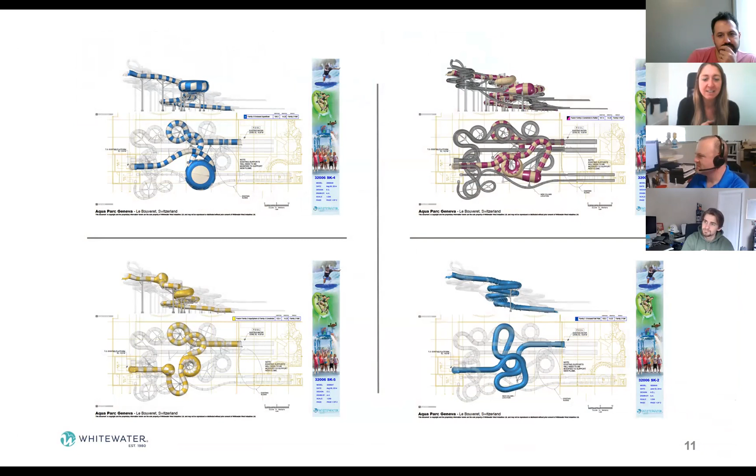And this is their marketing of it. And this is the slide actually built.

The closest clearance from the new slide to one of the existing slides is like 3 inches. They were basically pushing fiberglass out of the way to get it to fit in there. We're glad they had a good site surveyor to ensure it was actually correct when we got on site.

The next one I feel like I must show you is Rokko Island. Rokko Island is a project in Japan, and Whitewater has a long history of doing projects there. It was our first international foray into the Asian market. We met a Japanese man and started building water slides with him.

They wanted 100 slides off of one tower, and we said that's way too many, not possible. So we ended up doing 50 of them. The entire thing was designed on onion paper - we didn't have any computers at the time. It was all just a big stack of onion paper slide path designs.

Then this entire island, Rokko Island in Japan, had an earthquake that broke all the foundations. All the mechanical systems were ruined, everything around it was ruined, but the water slides were still standing tall. An agent in Japan started taking these apart and trying to sell them to parks as secondhand slides. We had to call him and kindly ask him to stop doing that, because he was eating our lunch - we couldn't sell anything because he had all these used slides on the market.

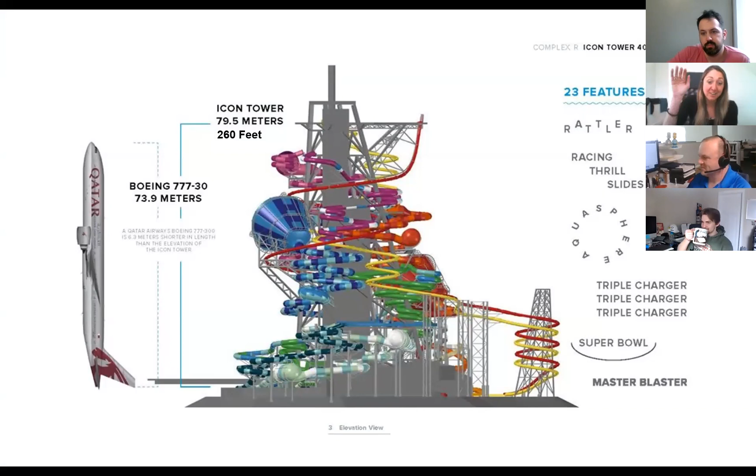And then there's a ride that goes from the very top all the way to the bottom, which is like the longest slide of all time, by far.

This project has been conceptualized for the last maybe 7 years, and we saw renderings of it, and we had no idea if it was ever going to get built. And they are well on their way to constructing this.

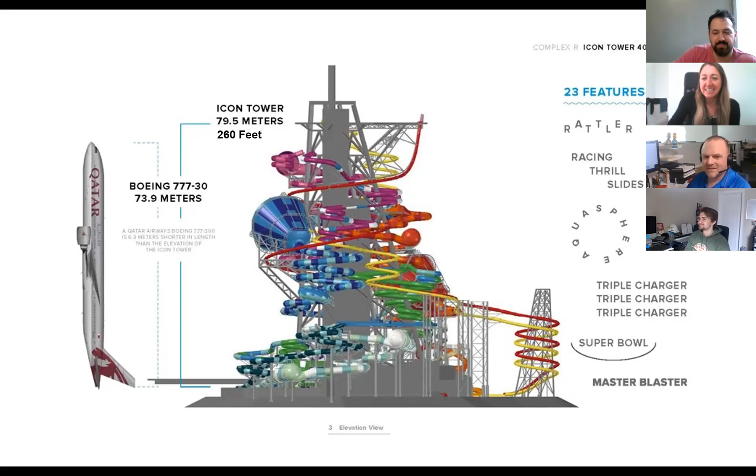We've got fiberglass on site, and we've got steel on site, and they're opening for, is it the World Cup? Maybe this. I might be wrong there. But if you want to go to the next one, Kelly.

So it's on a man-made island, and there's a train that you line up in the rest of the park, and then take a train over to the island, and it takes you to the central core where there's food and washrooms and everything within the central vertical water park.

We had a lot of questions when we were starting to work with the client on this. How are we going to ventilate the slides? It's in Qatar, it's 100 degrees, and these slides are long, and they're going to be sun beaten all day, and they're going to be hot.

It's a big one. How are we going to get water to the top? How are we going to support the slides? This blue slide here is 55 feet across, and that's just hanging off the top of a tower.

And how are we going to build them? There's been a lot of questions, but we're getting through those, and the project will probably be open within the next 8 months or so. I think November is when they're looking to do that.

Alongside this massive vertical water park, there's also an entire other water park that is just kind of flying under the radar because everybody's looking at this. If you want to pop to the next one, Kelly, you can see that.

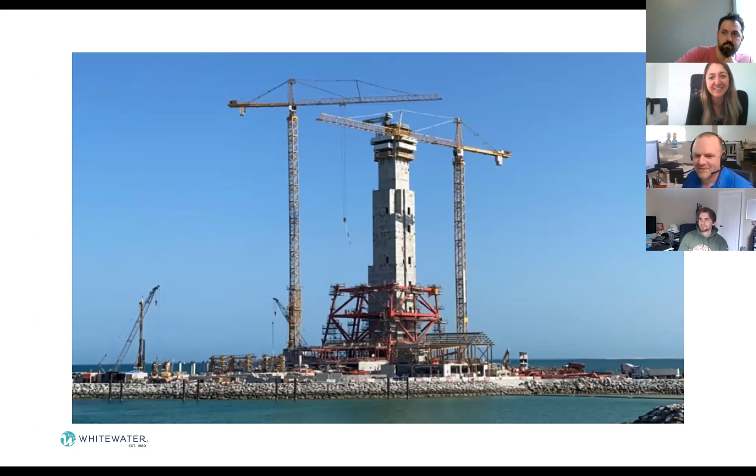So I like to call this the geek stuff. I was saying to Nathan before, I'm an engineer, you guys are physicists. This is like orangutans and gorillas, choose which one you are. We're very, very similar, we used a lot of the same theory.

So I'm going to go through how it is our team goes about making the slides safe. I tell people all the time that just because water slides are fun, it does not mean they're easy to make. Very simple. So when we get students coming in, I'm going to start from square one.

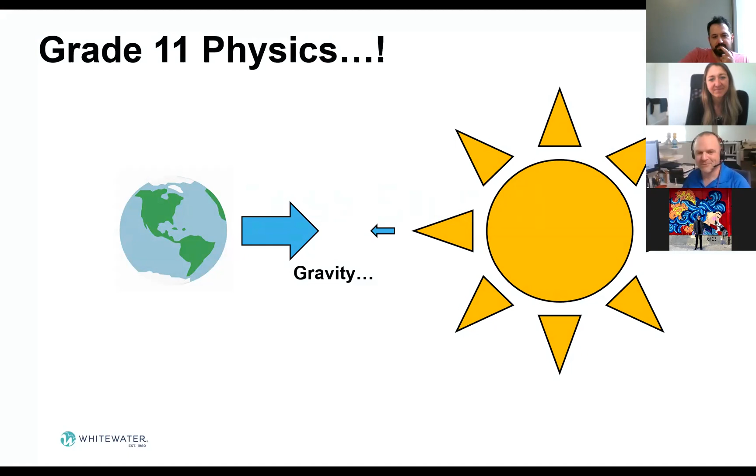Grade 11 physics. Gravity. It's the most reliable force in nature. The sun pulls really, really hard on the earth. The earth kind of pulls on the sun. Same thing on a smaller scale, it pulls on people. F equals MA, or mg.

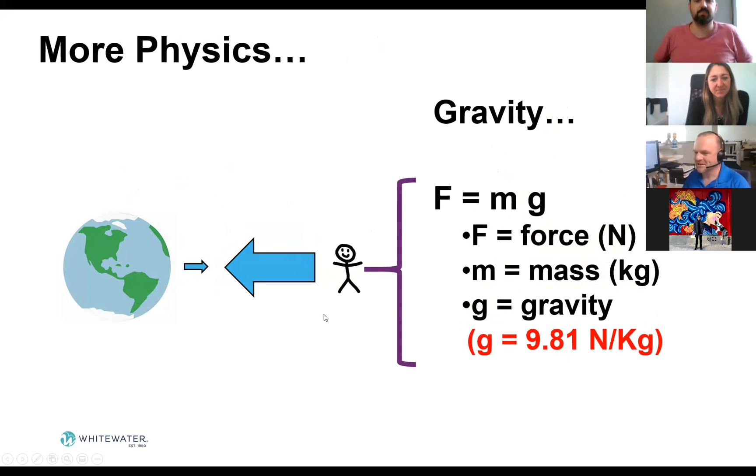But this is how, in basic principles, we work with the body flying down the slide. The force of gravity is split up into two vectors. Pretty simple stuff, but it's actually more than that. You're dealing with something you would call a cylindrical coordinate system, where you've got the basics of a body going down the slide, but you also have to consider the rotational component.

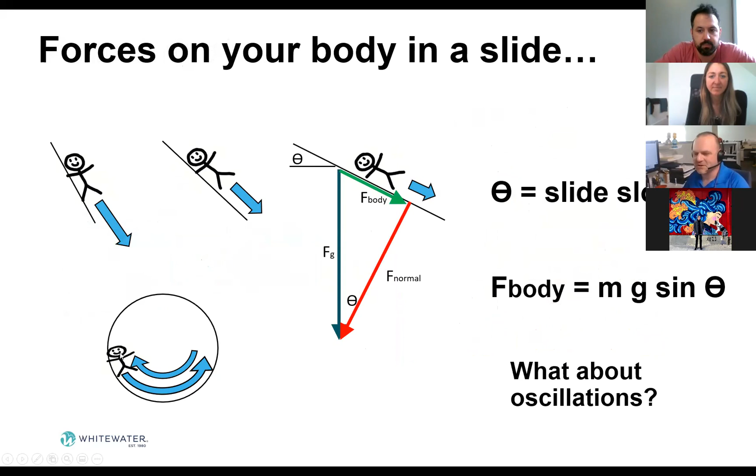So what about oscillations? Oscillations can be very dangerous if you sweep one way on a slide and then suddenly sweep the other way just as they're oscillating to the top, and suddenly the slide sweeps away, then you can send someone airborne into the far wall. And that is one of the design features or design criteria that we follow.

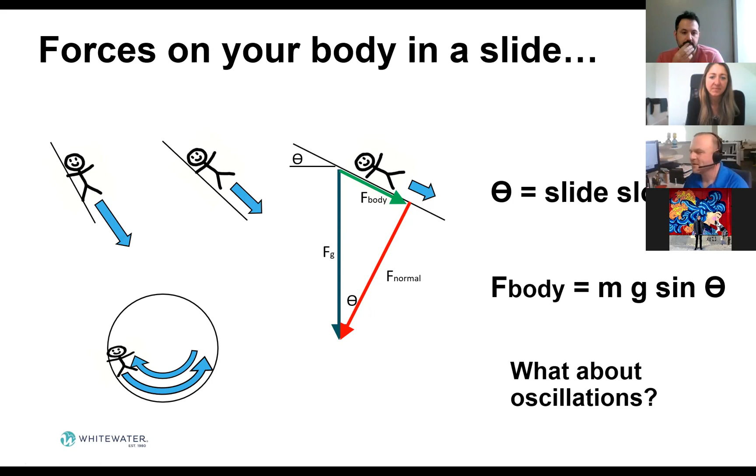It's called switchback analysis, or oscillations. So let's see, next slide is how do we actually do it?

We have two proprietary in-house pieces of analysis software. One is a very detailed simulation system where we have a liquid-cooled supercomputer not far from me that runs simulations all day. It can take half an hour or more to run a simulation on a single slide. So this is an enormous amount of data being run through and analyzed.

And what it's really doing is breaking up this slide component. This one on the left is simplistic—you could solve that with a single calculation. On the right, it's a very complex, sweepy, curvy shape. So what it'll do is break that up into, I don't know, 10 million parts. A lot of parts, and for each one it considers what the energy state is coming in, what the energy conversion is across that element, so you know roughly what the energy state is at the exit. And the 'roughly' part is where the challenge comes.

We have studied and studied and studied this for, well, over a decade. Five years before I started working here, we started working on simulation analysis, and it allows us to have a fairly high degree of precision in predicting how a slide will work with a body, a tube, or a raft. I'll show you some examples later.

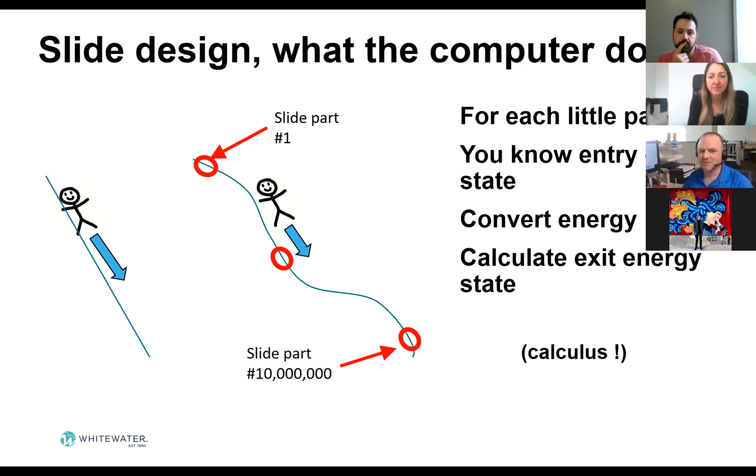But the common assumption, as I said, is that water slides are fun, therefore they must be easy to make. What we're really looking to eliminate are three conditions.

There's catching air—you want to give the illusion of someone catching air, but that doesn't mean they're actually losing contact with the slide. You want to make them feel light, and that's a foreign feeling for them. You also want to avoid giving excessive G-forces. Various regulatory bodies around the world have different levels of G-forces they allow you to work to.

But that's one thing. The reality is that, generally speaking, no matter how much water you put in a slide, if you exert more than 3 Gs on a body going down it, you will give them skin burns, no matter how much water is in the slide. So that's kind of a pretty hard limit to work to.

And then, as I said earlier, there's poorly timed oscillations. If you do it just wrong, you can give someone a very bad day. And we pride ourselves in the depth of analysis and utilizing the work we've put in over the last 10 years of fine-tuning these tools.

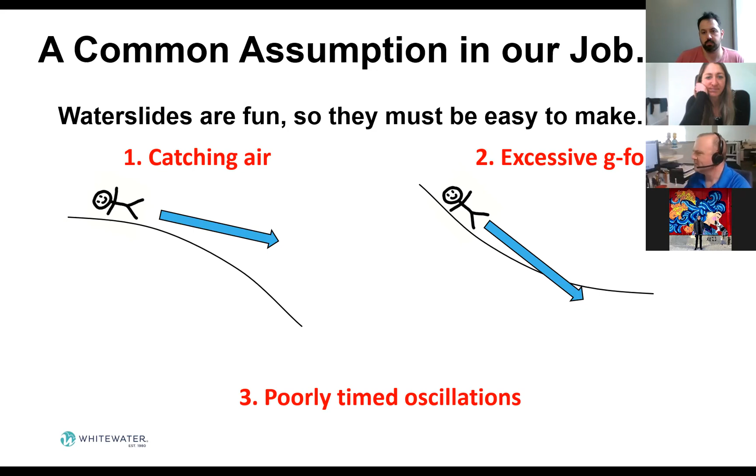So how do we go about designing the ride experience? I like to say we design the experience, and that results in the water slide design. So what we'll do is Emily will be dealing with an end user or client, and they'll say, I want a slide that's steep and fast, or one that oscillates and lets you feel light, or one that really whips you around a corner. So we can design—okay, this is almost the story of the ride.

And then throughout, as you're designing it in our design software—just SolidWorks—we will look at it and identify, at any given point, the velocity at that point. I'm hoping you can see my arrow. Our simulation package can predict that velocity to a fairly high degree, and from that we know the grade they're operating at.

And from that, we have curves generated for all of our slide parts that show what you see here. The green area is 0.4 Gs or more. I've left the velocity off just because I don't want to get too deep into the hard numbers—I just want to show the theory here.

The higher the velocity, the less steep you can tolerate before it winds up getting lighter and lighter. So the green area is a relatively benign but fun slide experience. The yellow area is what I call the sweet spot. If we map the velocity from our model to the grade at that particular spot, that's where the bang icon is, and if that exists in the yellow band, it tells me the rider is going to experience between 0.2 to 0.4 Gs.

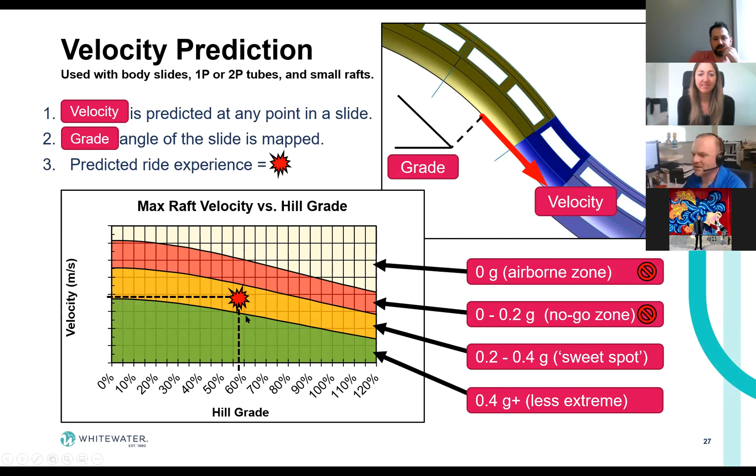So, predicted velocity versus grade - this is how we design and tune the experience. Every one of these sections has slightly different curves. These are the convex parts, mainly for water coasters - one section of our product matrix. But the concave parts at the bottom of a drop, where it comes down and goes up a hill on the other side, we can also look at the G loadings you meet - the top line is 3 Gs and the bottom line is 2.6 Gs.

CSEI is the Chinese regulatory group, and ASTM is generally everywhere else. So we can predict based on that. One thing to note is if anybody ever applies to Whitewater, we will ask you about the G-forces allowed on a person in an interview. That's a question that comes up all the time, and it's always at the end.

I got asked that, and I think I guessed 8 when I first started. So I gave away the answer. Yeah, you gave away the answer. I mean, you can also Google it, but it's something we ask kind of tongue in cheek.

Okay, so these charts are showing what the body will feel like as it's feeling light, and this chart here for multiple flumes shows what the body feels like when experiencing excessive Gs, like being pushed around a corner or through a drop.

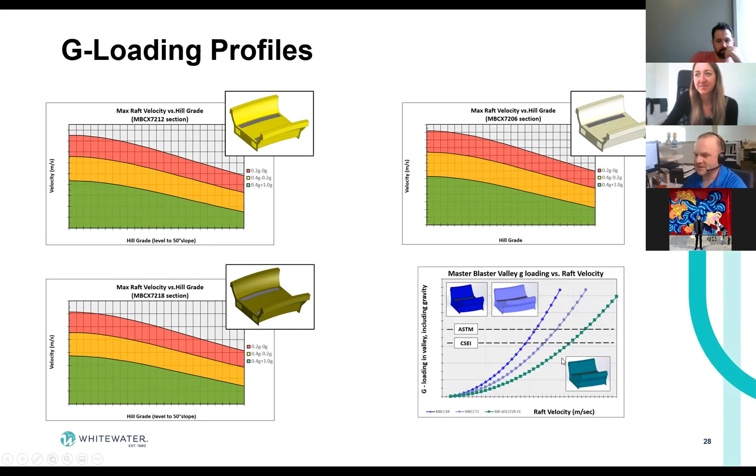This was the first project I went to when I joined Whitewater. I was the first Whitewater employee to ride this thing, and my heart was in my throat - I didn't know what I was getting into. It's an exhilarating ride. The initial drop is on the order of 10 meters or so, about 30 feet. At the bottom, you're doing between 13 to 15 meters per second, so it's fast. You feel around 3 Gs at the bottom.

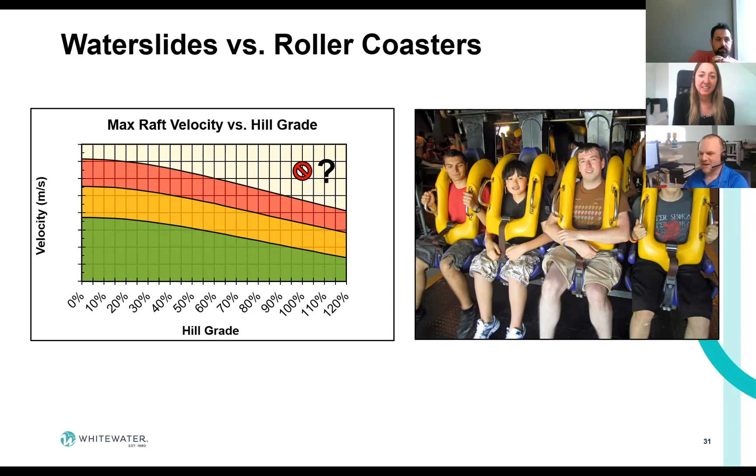However, in a roller coaster, it's different because, as you can see, these people are strapped in. There's very little that can happen to them. So I'll get to the other physics and analysis that affects them here. It's not all just about g-forces—there's, of course, position, velocity, acceleration, and jerk.

So these are all derivatives of one another, and jerk is the one that many people don't know about. I tell my kids all the time, do you know where the name Rice Krispies came from? Position, velocity, acceleration, jerk, snap, crackle, and pop. In my past experience with industrial automation, we went as far as snap, crackle, and pop to get sub-micron tolerance positioning of servo systems and so on.

But in water slide design, we handle position—that determines the launch frequency, how many rafts you can put into a slide design and guarantee that they will never collide with each other. We call that zoning a ride. Then velocity applies in safety codes and slide design—do you want to make it fast, do you want to make it slow, do you want to make it exciting, yada yada yada. And then acceleration, preventing airborne conditions or excessive g-forces.

But that's not everything—jerk is important in terms of avoiding whiplash. And every time I talk to an engineer or a physicist, I always throw in this gratuitous geek joke. I've got this written on my wall right beside me, and it says, "Don't be a jerk."

So what's really going on in the background is we all love calculus, right? I hope there's some heads nodding. We all do calculus—I hated it when I was in university, but you have to do it.

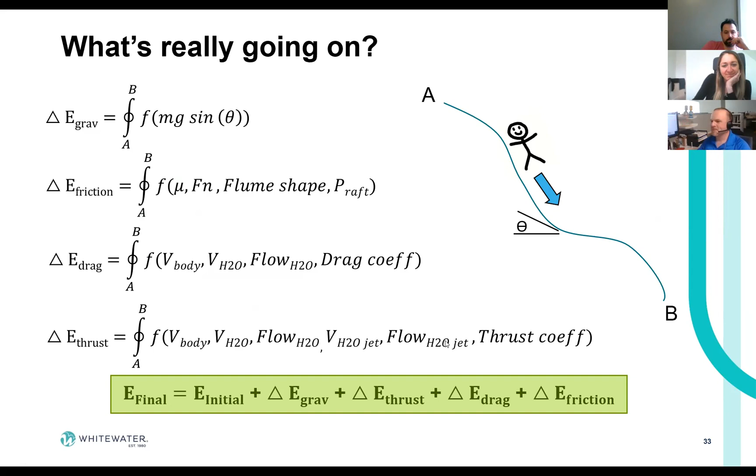But what happens is if we were to use a whole bunch of really high velocity water jets, then what you'll have is that the differential between the velocity of the water is exceeding the velocity of the tube, to a point where the tube never catches up to the water. So basically with high-speed water jets, the raft speed never approaches water jet speed, so the thrust is always maintained. The result is if you have a whole bunch of high-speed water jets pushing a raft that happens to be low weight, so a very small child, you can cause them to overspeed. They will accelerate continuously for a lot longer than a full-grown person like myself or Emily.

And the net result of that turns into product robustness, where your weight envelope of your product gets smaller. You wind up having a smaller upper weight limit and a more conservative lower weight limit, because you know your product is only robust in this little area. Whereas in our case, we choose to use a lot of water such that the velocity of the water and the velocity of the raft are not far from each other in the end. What that means is that as the tube velocity approaches the water velocity, the thrust tapers off, so it's self-controlling, and it's proven it in terms of the master blaster I showed you earlier. The weight envelope of safety and robustness of that product is actually very wide.

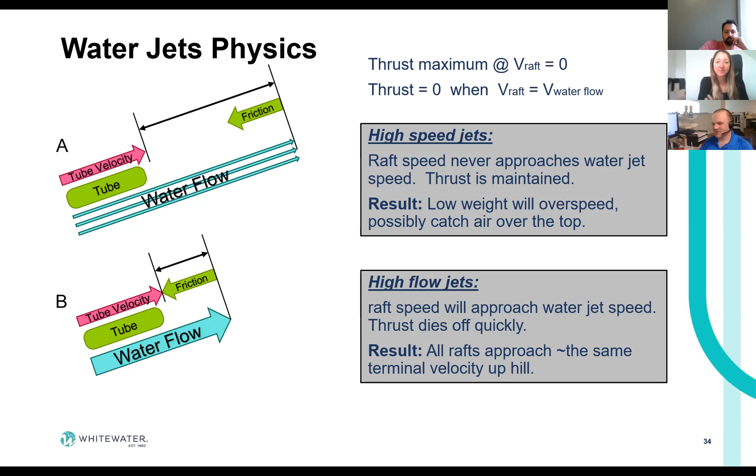So it's not overly sensitive to the weight of a person. You can put a very light person in, or a very heavy person, or two very heavy people, and the raft or the ride will not operate radically different than a very light person. And it's done that way by design. So there's a lot of physics and detail in these things - it's a very complicated issue for us as a company.

We've got rafts with 6 people allowed in them, and that could be anywhere from 6 young kids at the age of 6 years old that weigh 45 pounds each - I don't know how much a 6-year-old weighs - or you could have 6 grown men. We're doing a project at a football Hall of Fame, and you could have 6 linebackers in there. So it really adds a dynamic and an element that we have to account for, whereas on roller coasters that isn't as much of an issue. Seating position within the raft also can change how the raft oscillates - it can rotate differently. If there's one very heavy person in it, it can have the whole ride operate differently. So it's a big component of Kelly's difficulties - it's a major source of my stress.

Yes, it's a good stress. Also on body slides, sorry to interrupt, Kelly, I've ridden a lot of water slides, and you can go slowly sitting one way. And if you get up on your heels with your shoulders, you can go 2 or 3 times as fast.

Rider position is one aspect for us, and another is different materials of bathing suits. In the Middle East, we do a lot of water slides, and people wear what they call burkinis. It adds a lot of drag to the rides, causing people to go a lot slower than they would in a typical water slide where people wear normal bathing suits. So there are a lot of different elements when it comes to materials, weather, and different cultures.

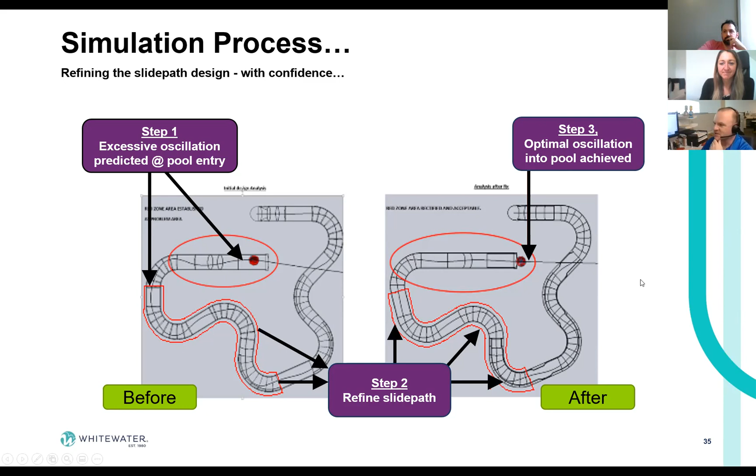Okay, but that's all wonderful—that's great. But how often do you rely on software as if it's gospel? That's where it gets interesting. This is how we do it: with both proprietary analysis tools, we don't treat them as perfection. They're continuously evolving. We've done this for a decade, and we're going to keep doing it for a decade and more.

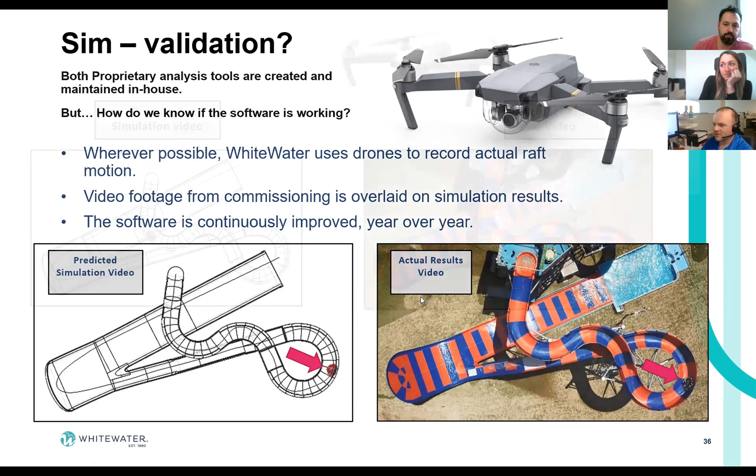As it says on the slide, this is the predicted simulation video, done more than a year in advance of actually building it. Then we get the actual footage, and we overlay them on top of each other. You can see the raft position—it matches.

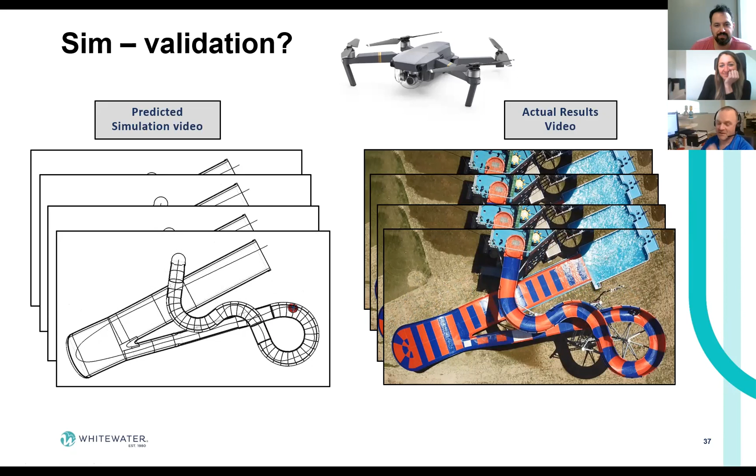So that, in a nutshell, is how we do our jobs. That's how we create safe water slides—it's all based on physics. I was actually very excited to come and share this with a body of physicists, because I find this stuff absolutely fascinating.